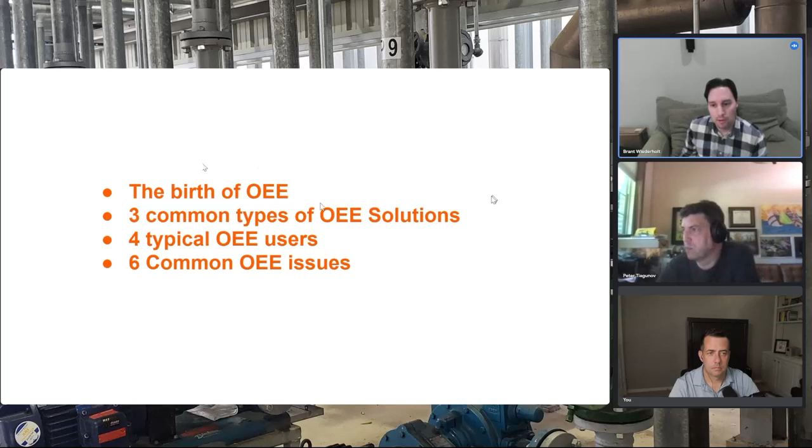Let's go into talking about ourselves real quick. Peter, you're the president of Agile. I would describe you as a solutions architect, a full stack solution provider. I'd probably say that your strengths are networking, architecture, database design, UI. Anything else you'd like to add to that? Pretty much the entire thing. Database, architecture, that's just part of it. Like you said, full stack means integration.

All right, now Johnny, you're the owner of Indusol. I've worked with you in the past. You've taken on a lot of small automation projects. You're mostly kind of a higher class Cadillac panel shop. You've done a lot of oil and gas type projects. Anything you're famous for, or did I capture that right? You got it right.

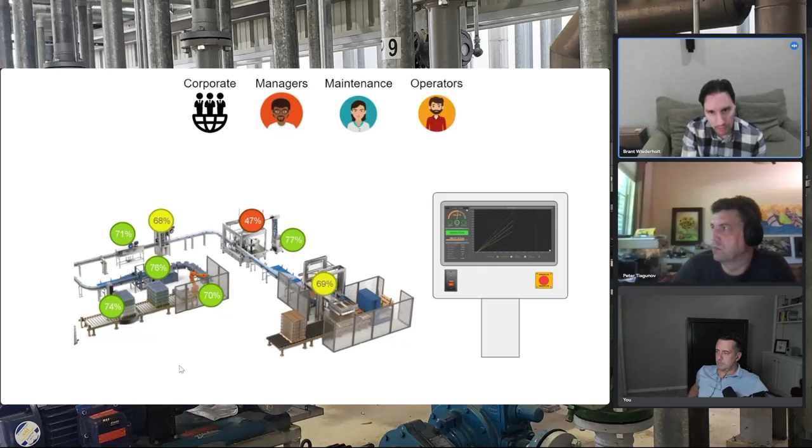So the first thing is that once a plant is automated, this is the third generation of automation. The process is already automated, and now we need to start collecting and analyzing some of the data on that production floor. So today's OEE discussion is going to try to solve the problems for four different users: corporate, managers, maintenance, and operators. Each one needs a unique type of solution and different tools to analyze. Let's go through it.

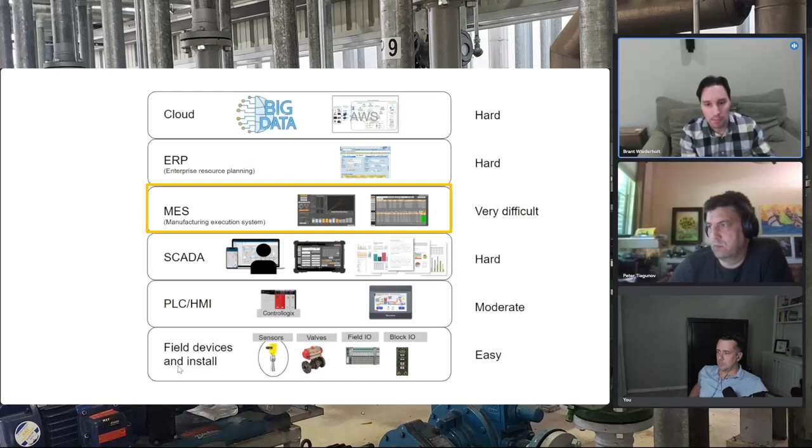So inside of MES there are different features. Today's focus is only going to be on the one at the very bottom, which is the performance analysis. This is going to be the OEE. Other discussions about MES we'll have to do in a later video.

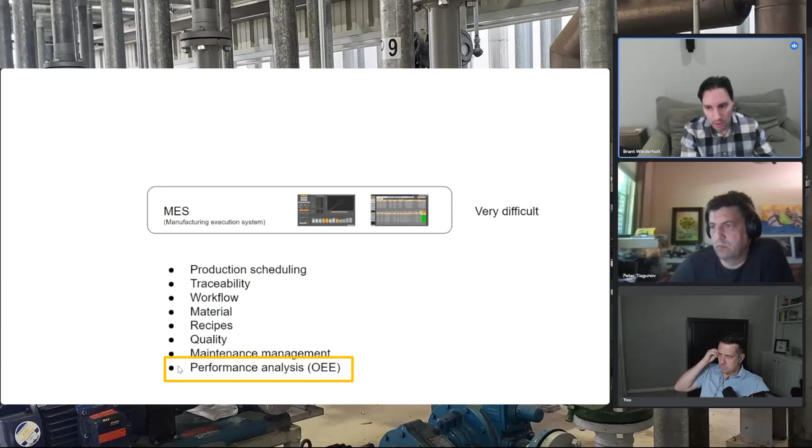So this mostly is a discussion about trade-offs. There's lots of different ways we can go about solving this OEE problem, whether it's a digital thread or a UNS type architecture, whether it's even worth looking into an MES or OEE solution, buying or building, or the type of people who want 150 different reason codes for an OEE solution. So the trade-offs are going to be initial cost versus ongoing costs, commissioning speed for scaling, whether you want flexibility, whether you can handle human intervention or need that data to be automatic, and whether you want an open or closed architecture. So we'll be going through all this.

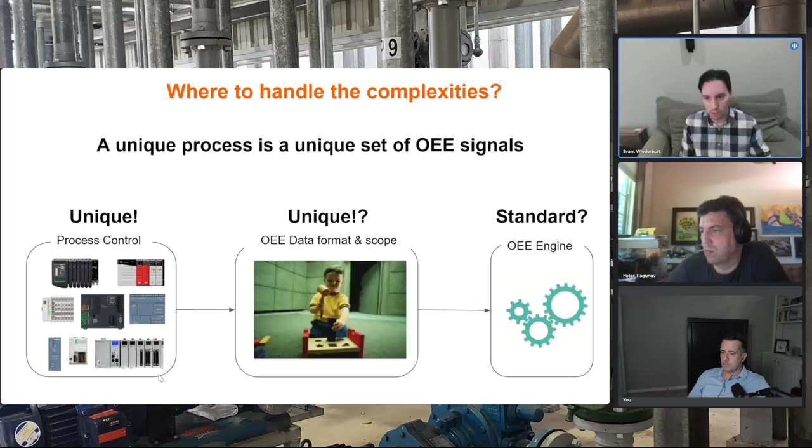All right, so another thing before we start, we want to talk about this. I posted something up on LinkedIn a few weeks ago about this, but this is where most plants start, and that's perfectly acceptable if you want to start getting into it. But they'll start with a whiteboard or an Excel sheet. They'll start capturing it and realize that it's consuming too much labor to actually produce these numbers. You'll find out that the numbers are being manipulated, that it's not real time, and that you're spending your whole day trying to update these spreadsheets. So this is a great start, fairly easy to get into, but it doesn't scale.

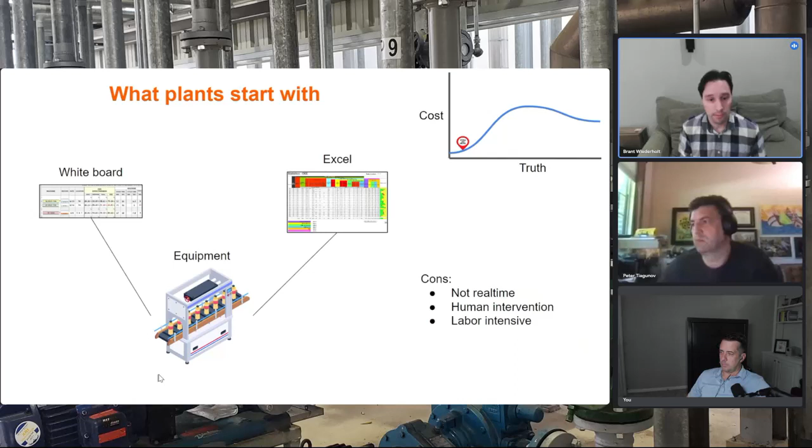So we're going to talk about three different types of OEE solutions: too far from the process, approaching the process, and part of the process. We're going to start with the first one, too far from the process.

What that looks like is, if you can see on the left-hand side, you plug into equipment and grab that data. You could go from 250 feet all the way to several thousand feet, but you'll see that corporate is seeing some data, though these two are so separated from each other that they don't necessarily communicate. They don't get to see it. The operator doesn't get to see what is going on or what he needs to improve upon. And corporate is only getting data that it receives, with no idea about its accuracy. So honestly, corporate is probably getting bad data, and they don't even know what to do with this.

So it's just what I would consider a very short-term solution. It doesn't provide a whole lot of value. And most of the time, what happens is that the operator is actually manually entering reason codes, which I'll go into a little bit later, but when they manually enter reason codes at the end of, let's just say, the end of the shift...

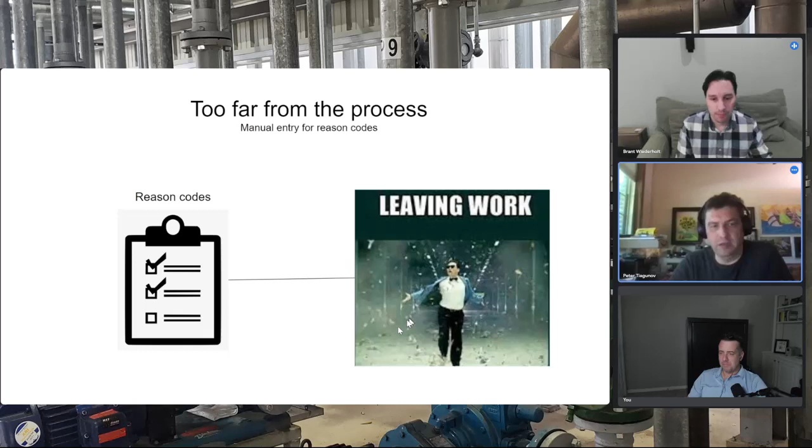It's kind of like asking a fireman whose house is on fire to fill out a form before he goes in—precisely. Like let's do some inspection before figuring out which category of fire, what's precisely going on, how it probably happened. Do some analysis first? Of course they do the analysis, but without any report—all of that is done after the fact, all the paperwork. Same thing here: the operator is nearly the same as the fireman in this scenario. All they need is to get it back and going. That's the only thing they'll think of.

So if that's the case, there's going to be a report at some point. And if you start really analyzing a certain line and realize it's not truthful, then this report is worthless because it's got too much human input or intervention. So why even produce it—that's our problem.

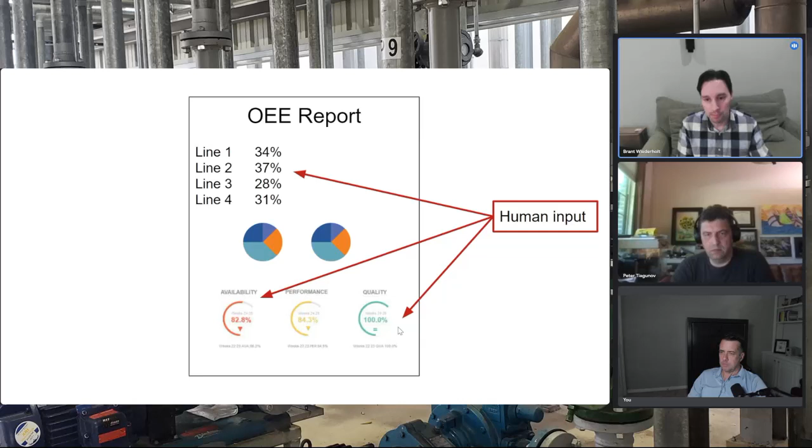The only time I could see this actually being put in place is for machines that don't have a PLC. You're not going to get a whole lot of data out of it, and you're not going to get an accurate, correct OEE solution, but you can get performance, uptime, downtime, how much is actually processed. This is a perfect application for it because you're not necessarily trying to capture high volume—it should be something very repetitive.

Now, a lot of manual, and it should be repetitive. Yep, so alright.

So now we've actually fallen into the second category, which is the standard typical solution. This is what we see all the time. There's different variations, and we can talk about a few of them. But it's what I call an OEE IT special. This normally is a cloud type solution. So the concept is that they could go onto the production floor, connect and pull up all this data into the cloud. Let's talk about a little bit of it.

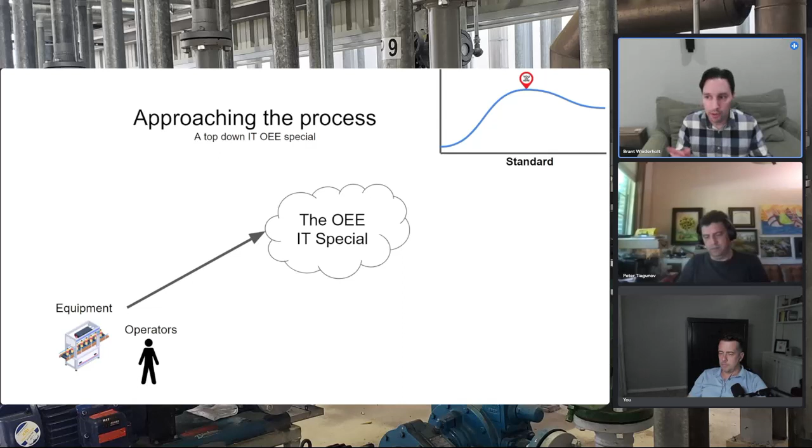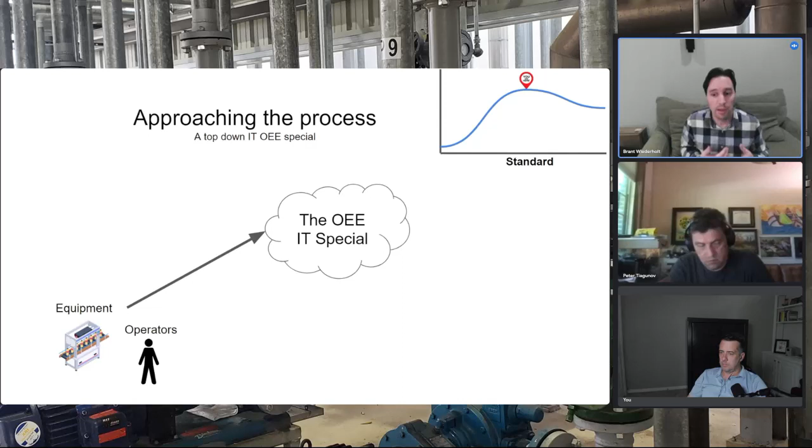If you can see on the top right hand side, obviously the price has gone up. It depends on whether there was a cost associated with the initial hardware, and most of these cloud type solutions have a subscription based model. They could be subscription per month, or it can be something to where it depends on how much data you consume, and they just charge you on the data.

Here's a list of Amper, Plex, and Peter, you might not know this, but Rockwell Automation purchased another piece of software called Plex System. Yeah, Plex actually is SAP online in a way.

Got it. So then there's the Redzone that we talked about. There's SAP DMC, now it's just SAP DM. Then you've got Shoplogix, Versacall, Vorne. There's a bunch, got to be at least 500 out there, and they're all screaming to be the number one solution provider. But these are solutions that can scale fairly fast, but still have an ultimate flaw in the design of it.

Let's say these type of solutions do have integration to the automation layer. So they have some way of talking to the controllers, typically OPC UA, I would say, not to mention OPC DA, yeah, on some of the older plants. So because they have some of the connections to the PLC, we actually have it right there.

25 to 60% of the data is now automatic. They still only have alarm analysis, and we'll get to this a little bit later, but they do not have root fault analysis, and we'll be able to talk about that. Before they can even get anything, they have to learn about the process a little bit and try to figure it out.

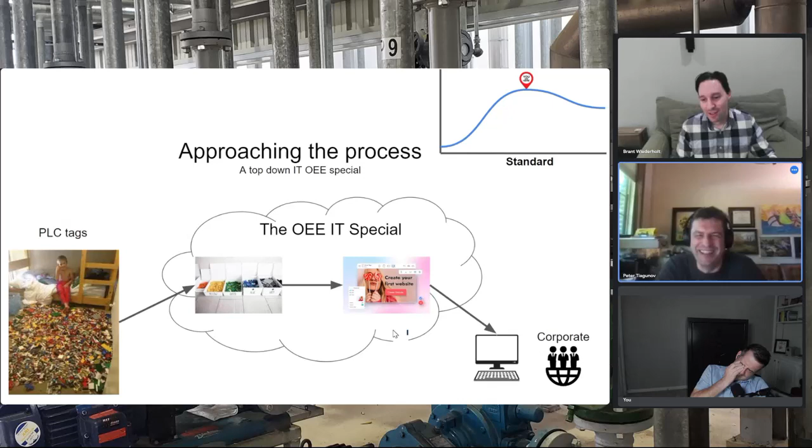So Peter, my biggest problem is the fact that once you take some of this data—you've burned through, I don't know, whether it's 200,000, whether it's $500,000—you've cleaned it and contextualized the data, and you don't really actually know whether you've done it the right way.

So there's speculation on how fast they went through and moved through the plant, but there's no certainty. So they're saying alright, now we got all that mass, all that zoo coming at us, all that noise that the zoo produces—let's try to make sense out of it.

So they put some wizard who tries to apply certain rules and says, hey, now this is how we're going to interpret this. Well, guess what—you have exceptions on top of exceptions on top of exceptions because the zoo is zoo. You have to know the process.

You have to be at least a little bit familiar with the machine, how it operates, what kind of signals it's capable of, what kind of signals it's not capable of. Some general attempt to interpret the noise, the zoo noise that comes in, and the higher tiers—it will not work.

It's not going to be successful. It will be successful if you have no zoo, if you have the same machines over and over, or if you have a preferred supplier who you told specifically before they even ship production equipment to you to have that certain type of interface to collect the performance data - let's call it at this point an OEE driver, OEE connector.

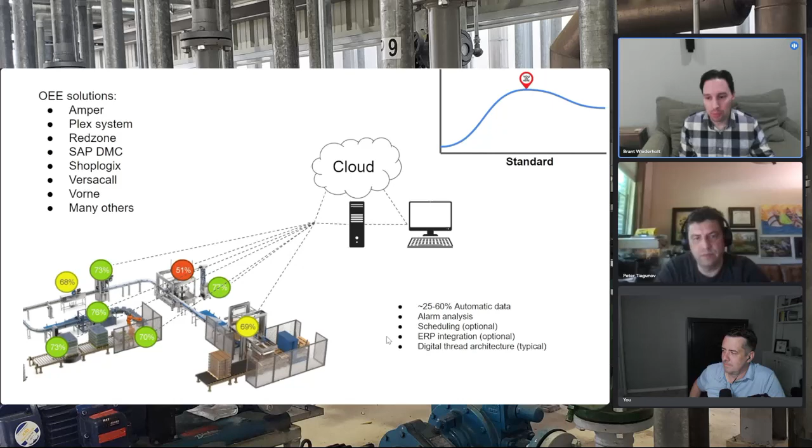But Peter, that was one piece of equipment, one line. The rest of the plant had nothing. It was given for free - it wasn't even part of the plant requirements. It was given for free by the machine builder. There's no integration, nothing - it's all done in the PLC. We're not even talking about some databases, clouds, etc. It's all done in PLC.

My biggest problem with the cloud solutions, Peter and Johnny, is the fact that once they clean it, they are not a node in an ecosystem. So they consume data, they don't produce the data. There's a lot of time spent, whether it's 200,000 or 500,000 dollars, they burn through a lot of labor hours, but none of it is provided to the UNS, where you can actually use different pieces of software to find the solution. You're showing here there's no UNS. Yeah, correct.

So what you've got is a vendor lock-in. What you've got is a data silo. So again, it's only a consumer, not a producer - call it a big data silo. It's under the assumption that one piece of software is going to be the only solution that you need, so you don't need any other piece of software.

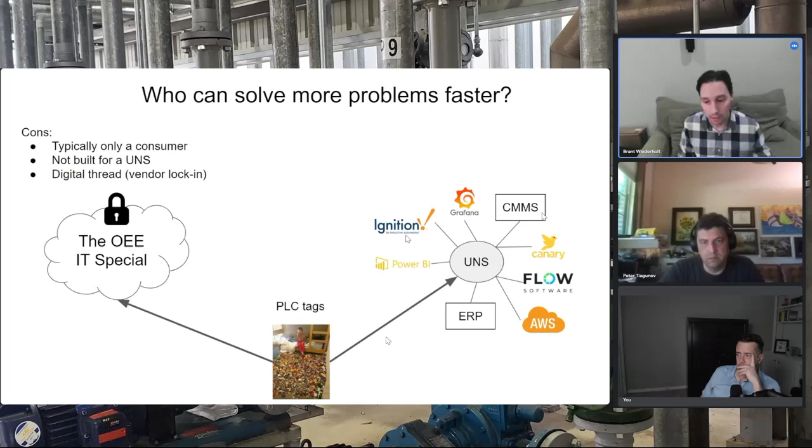On a fundamental level, on the left-hand side you've got an ERP, MES type of programmer. This programmer hasn't worn - I know this sounds funny - but my first question to them would be, have you worn earplugs for years? If the answer is no, they're obviously not spending a lot of time down on the production floor. Now, if you have a PLC programmer who evolved into an ERP MES programmer, then you have a success.

Because you have the guy who actually survived the field. You can't do it the opposite way. I don't know, maybe there are exceptions, but most of us here are basically coming from the floor, bottom up, from production floor up. But I haven't seen anyone who actually went from up down.

So on the fundamentals of how you can execute an OEE project, do you start with the ERP MES type of programmer that's $250 an hour, or do you start with an OT programmer on the production floor that knows the process? The answer is neither.

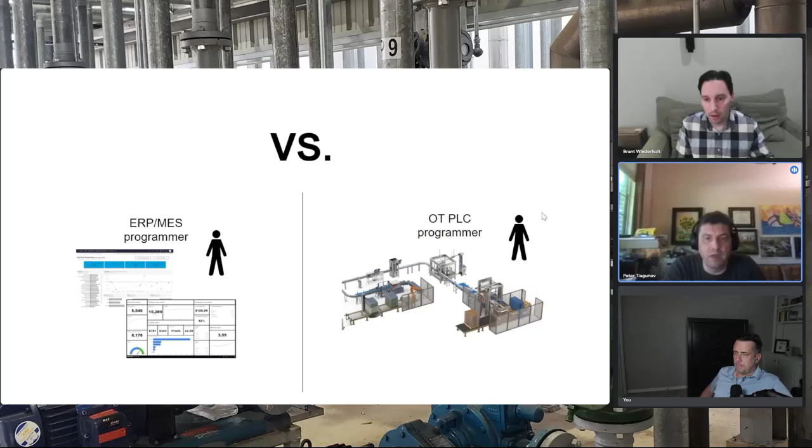Well, you would need PLC absolutely, but you start with neither of those. As soon as you say the word 'program,' it means you already have a project in place, and that's where you have these resources. The resource on the left is not going to be anywhere close in experience to the resource on the right. Completely different background typically, completely different objectives, different instruments, tools, different world. They don't mix, let's put it this way.

So then we're going to go into the third process. Part of the process is this solution. Basically what you have is you're embedding an OEE driver and a root fault driver into the PLC or into the equipment, and that provides a standard user interface into your OEE engine. This is a cheaper solution, mostly because it's not subscription-based, because the OEE engine sits on-premise. The hardware is already there because naturally you need a SCADA system anyway, so it kind of blends in.

So let's go into what this would look like. Essentially what you're going to do is have an OT programmer throw in the two drivers onto the equipment automation system, where he goes into the program, makes the connections. It's a process control system, a controller. So the PLC programmer looks at the process, looks at the program, gets a general idea of what's going on. It does not have to be, and typically isn't, the one who wrote the original program for the equipment. He just adds those pieces of software.

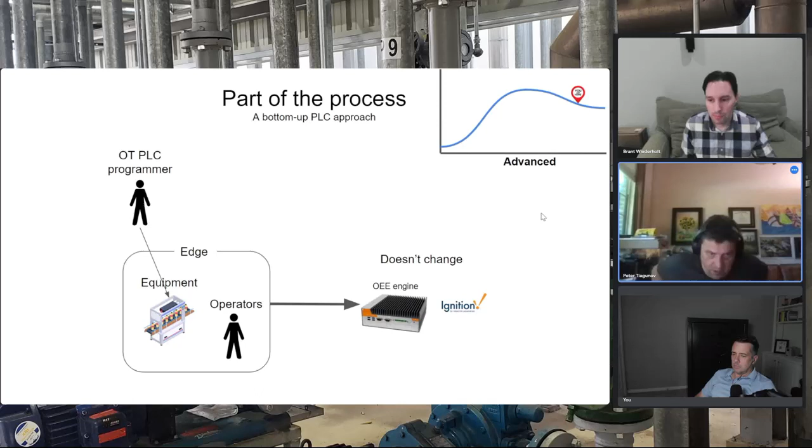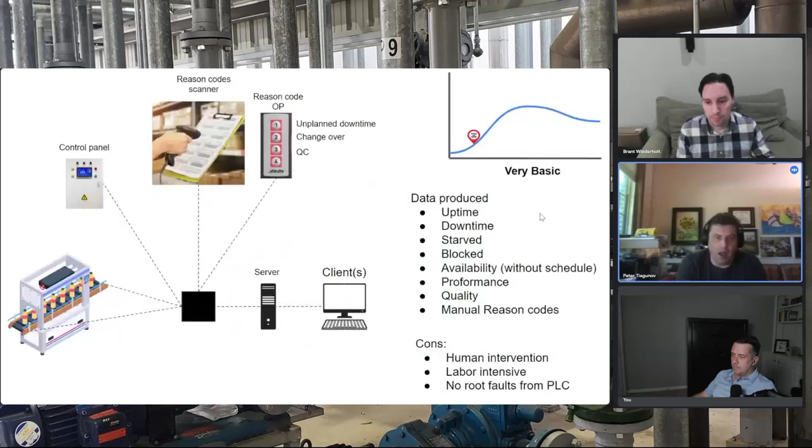Now the rest of it is of no interest, because at this point you can use any system and it will typically succeed. So the answer is very simple: you want to succeed, take your money, take the resources from the higher tiers, move them to the lower tiers, study the process, integrate specifically to the process. You'll get the standard, normalized output. You're done. You can pick the cheapest software out there and it will succeed, because it's easy to process a standard thing that looks the same, sounds the same, does the same blinking, everything is the same.

Yep, so yeah, fair, that's where we're getting.

All right, let's skip into the next chapter here. So it's the 4 typical OEE users, and again, they're going to be the corporate, supervisors, maintenance, and the operators themselves. So let's talk about corporate real quick.

The big problem or the solution that they want, or the answers that they want, are mostly trying to figure out capacity. So what is the capacity? Are they running the plant at capacity or not? Can they run more? So let's go into, I'm going to go ahead and scroll over to our metrics.

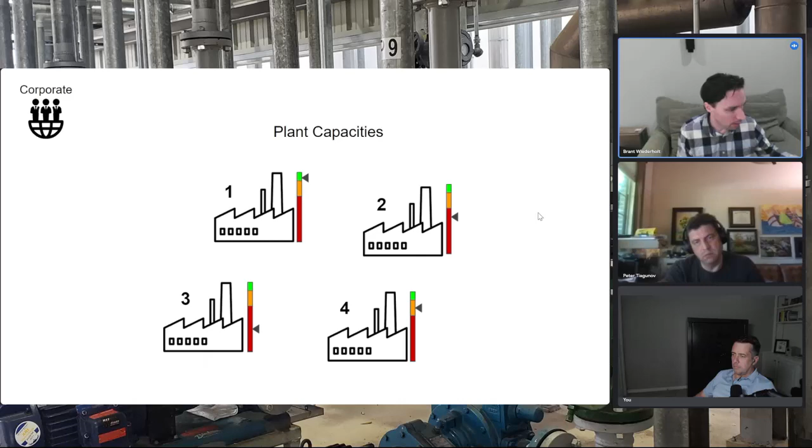Give me one second. All right, so capacity, let's go real quick. So this is the metrics - this is an OEE solution using Ignition. We'll go into a little bit more of the details later, but let's just go with Ignition with the OEE driver on the controller.

So say you're corporate and you want to know capacity. Essentially what you're going to do is go over to the historian, go over to the OEE aggregation. So say the problem is that corporate wants to know whether they can get rid of or eliminate the 4th shift, which is going to be Sunday and Saturday, and they want to know whether they can actually meet the production that they're wanting without the 4th shift.

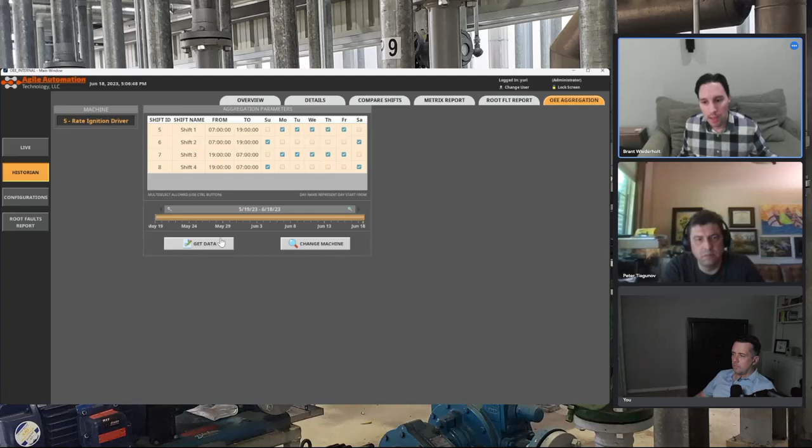So what I can do is highlight all 4 shifts, I can choose the whole month, and then when I get the data, it'll capture what I've been able to produce in the last month. And if I wanted to do that without the 4th shift, you can see that it gets reduced. So does this meet capacity? Will I still meet production and orders if I eliminate the 4th shift? So that answers that problem. All right, so then I'm going to go back.

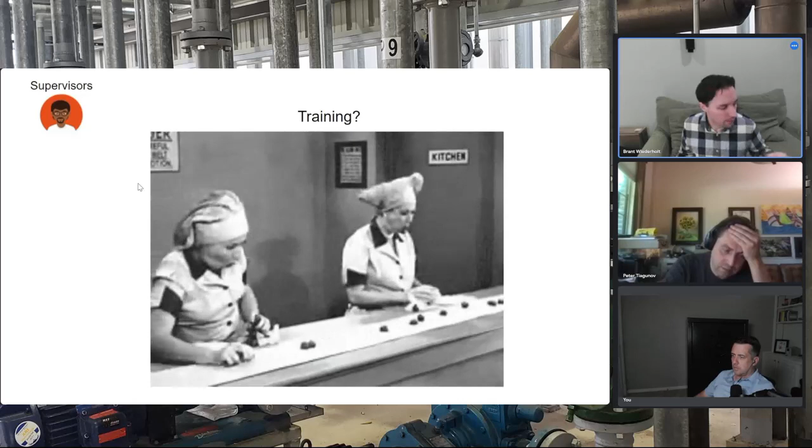So the next is going to be supervisors. Their big deal is, do their operators need training? Is there one operator that outperforms the other one? So we're going to go back to the metrics and we'll show you - there's actually a couple of things that we can show you.

We're getting into the states without even talking about what those states are, where they come from - what's the difference between production and, let's say, changeover, and production and starved and idle? How do you even figure it out? We'll get into the real details a little bit later, but for now we're gonna act as if we know this piece of software, and we'll just run through this real quick, and then we'll talk about the details later.

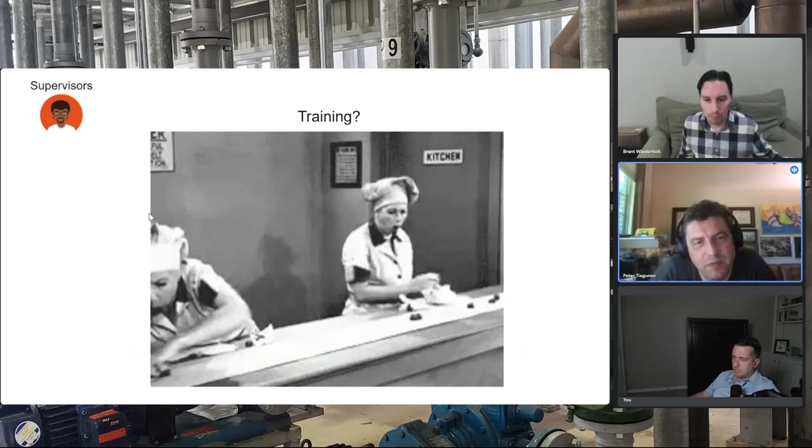Yeah, so that's the whole thing you've got going. You want to know if you're starting to have the same type of downtime, or it could be running but just not at the same target rate.

There's nothing that says, hey, out of an 8-hour shift, we're expecting it to run only 7 hours, because 1 hour is expected downtime. Call it contractual downtime, where you typically don't see it, but I see it a lot. So it's expectation versus reality — expectation is one thing, reality is different, and how much you can actually claim as expected downtime.

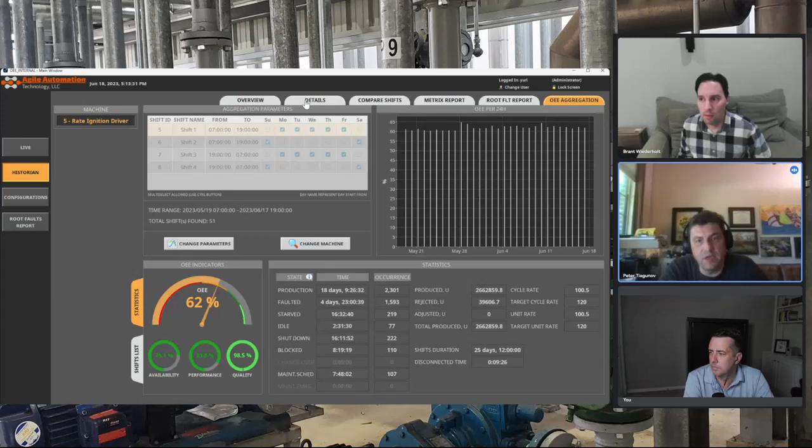If you wanted to look at the adjustments, there should be a historian. In the historian, you have the adjustment part — adjust OEE, boom, there you go. You can actually throw in additional rejects, and you can add scheduled maintenance, emergency maintenance, some shutdown. I'm assuming shutdown is a little bit vague on this particular one.

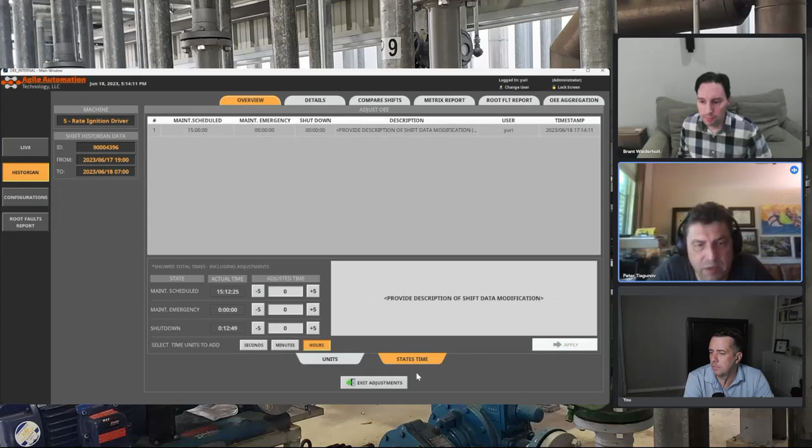I think it's expected downtime. So shutdown means it's been shut down for a reason and it's not supposed to run. So every time it's in shutdown state, OEE is not going to get impacted, because you're not expecting it to run. Makes sense, right, Johnny? Yep.

It's kind of interesting — this is where you get to: do you have a schedule? You don't have a schedule. Do you know what your expectations are? And you get to this point, like, how can you measure OEE reliably if you don't have any reliable expectations?

And that immediately throws the whole thing into utilization. You have production equipment on the floor, you assume it's supposed to run 24/7, and you measure it, and then you start messing around saying, well, it didn't run 24/7, it ran like half of it. How am I gonna deal with the other half?

But we're not even interested in that. We don't care about whether it was available, whether it was downtime. All we're interested in, all our interest in this system revolves around one thing only: we want to see it running, and when it stopped running, we want to find out reliably what was the reason for the machine to stop running. We don't care what the results are — we want to see what's stopping it, and reliably find out what exactly caused the machine to stop.

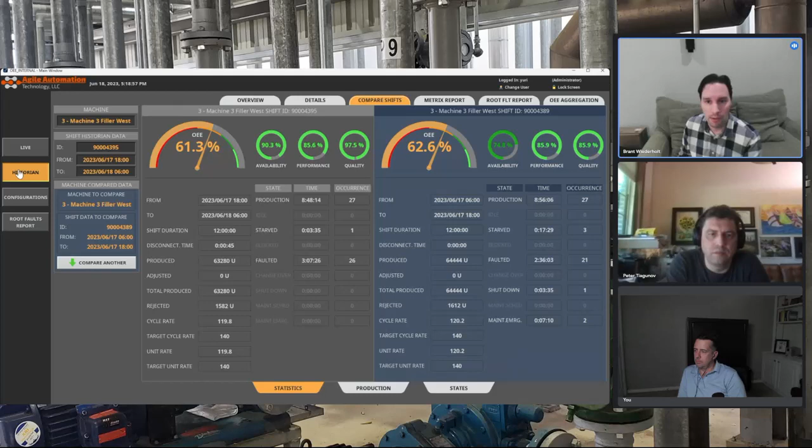So then what you've got is you can start seeing how many times it faulted versus the other one, what it produced versus the other one. So if the second shift is actually outproducing the first shift, you'll see that. You can always see that here with the OEE calculations, and you could scroll through, even see it historically farther out, so you'll start seeing a trend on first and second very quickly.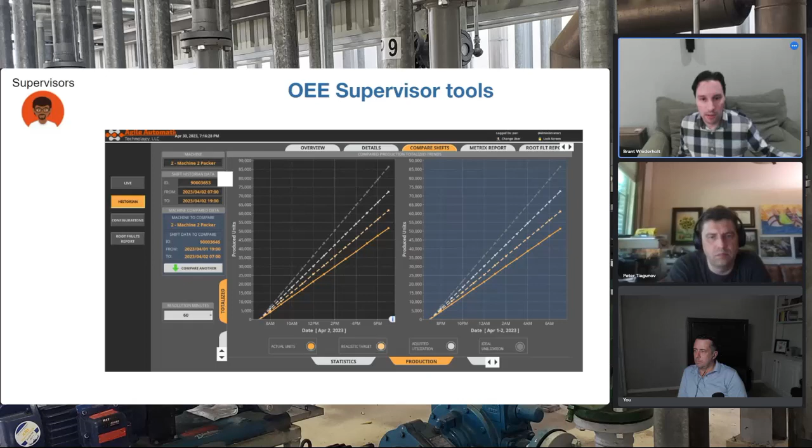All right, so let's go into the other problems. That was the supervisor - he did the compare. Then you've got maintenance. So maintenance, what do they need? Well, they would probably need a couple of things.

One is they can actually go to the historian and start looking at any of the OEE where the performance is actually low. They can then go into the root fault - let's go into that. They can do the root fault of the machine on that shift, or they can see it live.

But then again, this is where I'm a little bit not happy, because you're throwing the terminology around without even knowing - what is a root fault? What is production? Peter, actually I got that on the next slide, so we'll talk about it.

All right, so here we go - what we're looking at is the root fault. Is it live? Yes, assuming this is - I mean this is a simulation, it's simulated. So we're looking at some simulated equipment that is currently running a production shift, it's in production state. What we see on the right-hand side, where it's selected the root faults, is the hourly distribution of faults for that specific machine.

You have a timeline that shows when faults increased and you see the occurrences. Unfortunately, the simulation is a bit evenly distributed, but anyway, you see the first hour had no downtime, no faults. The second hour, around 7 a.m., hit several faults. It was one, then none, then it starts occasionally increasing, faults basically evenly distributed across the next 7 hours. Not the best example here, but anyway, that's where you start seeing a much better picture.

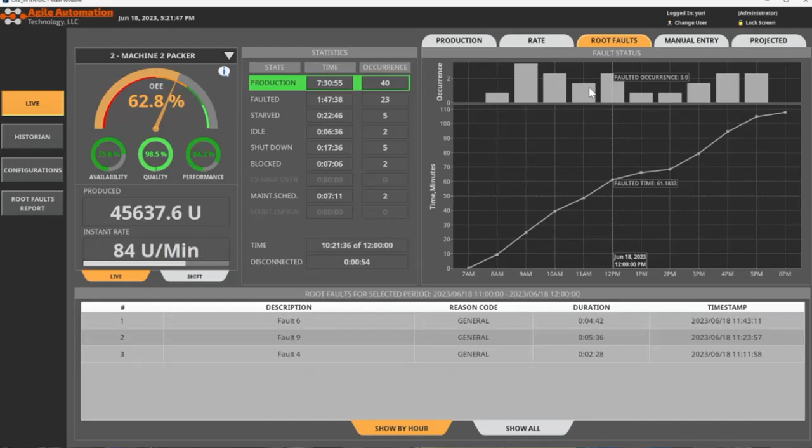There you go. See, here you have a case where you have some fault, and by the way, click on the hour and occurrence, click anywhere. Okay, gotcha. There we go. See, click the tallest one. There you go, see what it does.

It tells you that during the 9th hour—sorry, the 3rd hour—there were 4 faults totally recorded, and those faults caused the machine to interrupt production. One of them is fault 4. You have a timestamp on how long it took before the machine resumed production or transitioned to another state. So what you start seeing here is the unexpected downtime during this particular hour of the shift, and the reasons why the machine interrupted production have nothing to do with a human.

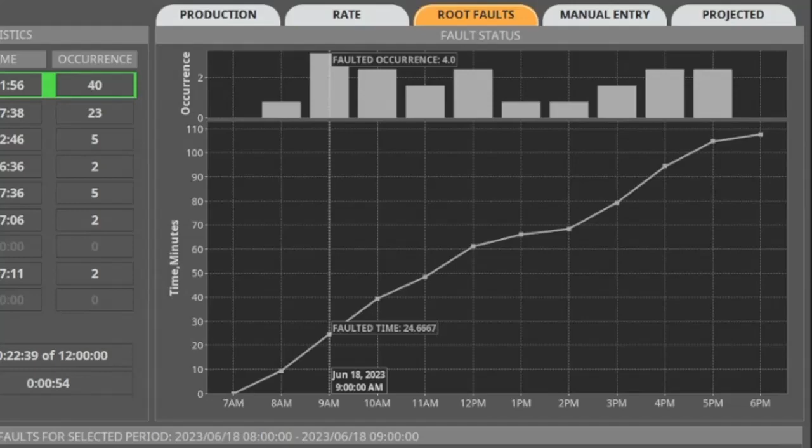That comes directly out of the native fault logic of that specific equipment. It is simulated here, but let's talk about that. By the way, the fault description is custom. So this is usually simulated—normally they are taken from the PLC.

All right, let's go into what root fault is, because this is a big deal. Say you have a piece of equipment and you open the door—that obviously shuts down the equipment. Typically what happens on the HMI is you get flooded with a bunch of cascading alarms. Imagine a plant with about 150 devices, all plugged into the network—your network is just going to get flooded with these alarm triggers.

Depending on the type of system, your cloud solution would see all of these alarms unless there's some logic embedded into the PLC, because these alarms happen so fast. So really what you want, instead of an alarm list, is a root fault—the one that's actually responsible for the alarm or responsible for the downtime.

Let me get this—do you have the diagram of the root fault? Okay, so the machine/equipment is operating, making production, then production stops, and at this point the logic kicks in trying to catch what is the first fault at that moment. It's configurable for a certain time frame to catch the fault. If it doesn't see a fault within, say, half a second or so, then it's going to say it's just an unknown shutdown—there's no fault, the machine has just stopped.

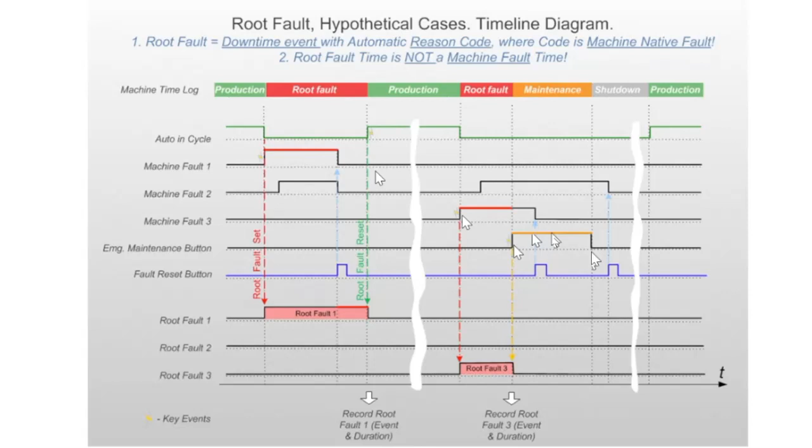And they're showing you why the machine keeps stopping, from the perspective of the machine or equipment itself, and also from the process. That's why we say if we're close to the process, we know everything about it. If we're far from the process, it starts becoming blurry and blurry.

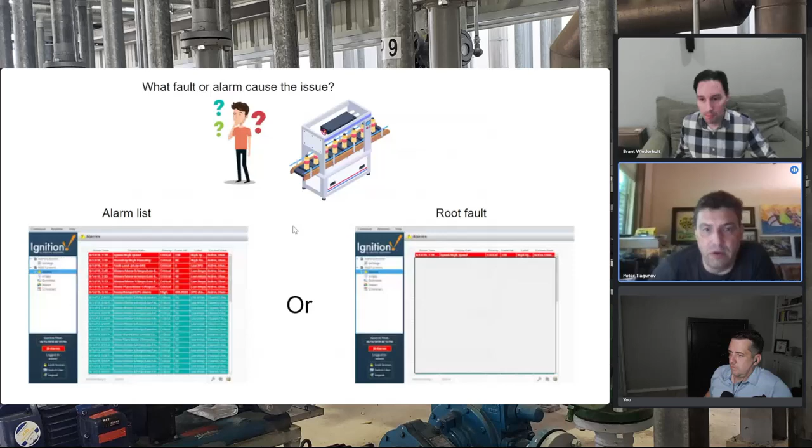It's the reason why solutions like this never get you to the truth, because you haven't installed anything into the PLC. You haven't learned about the process. You haven't added the root fault analysis logic to it. You'll never get to the root fault.

Let's emphasize measuring productivity. Measuring your throughput or equipment throughput is not OEE. OEE involves measuring how much product the machine produced along with a general idea that downtime was that much, without any specifics. That's not OEE, it's a very vague interpretation of production statistics. But that word gets used more often though.

Well, because nobody knows how to properly get this. So we've got root fault, we now understand about why we did what we did.

Then there's the last user, the OEE operator. There's a very good chance he's going to have an interface showing him how his shift is doing. I think it'd be wise to also show him how his last shift did. It might just be connected to a piece of equipment, or he might be dealing with a whole line, so it would show not only per machine, but also per line.

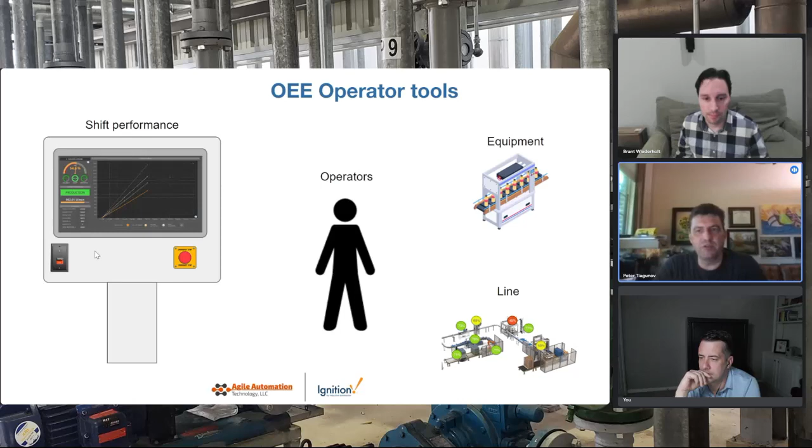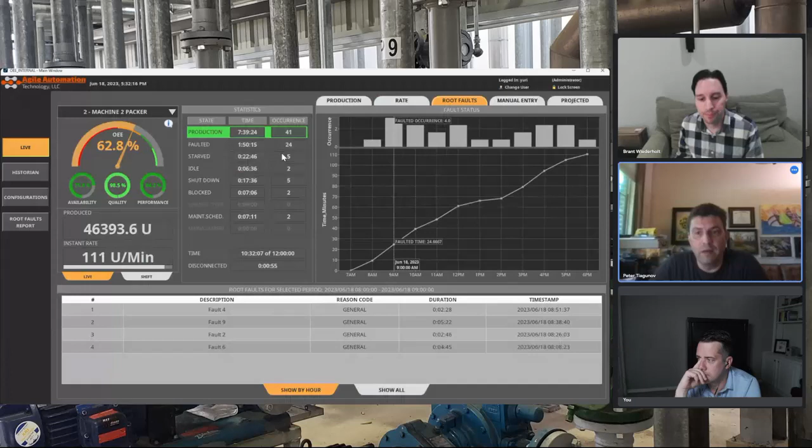They were constantly running on a low buffer, and it caused the machine to go production, starve, production, starve. It was thousands, hundreds of thousands of those transitions during the shift. So what it took was simply increasing the buffer. Before, the machine would signal the upstream machine saying, hey, send me less. Now it's like, no, send me more. I'll have more, because that's so infrequent. That immediately took it to the next level.

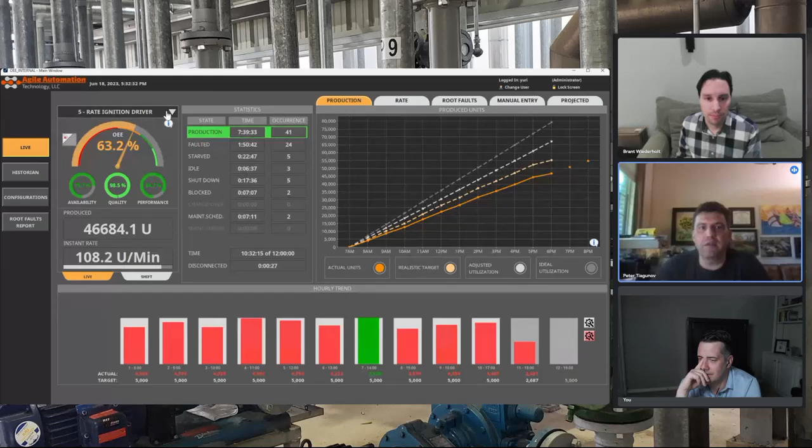But look, the operator has no clue. They look at this and they don't understand why. They don't know that there's a connection between the filler machine and the machine that sends the bottles to fill, and that the buffer is involved as well. That's the funny part about showing plants their OEE for the first time.

And Peter, we've seen this happen all the time. The first week they actually see really good data, they realize there are huge, massive faults, huge issues. Mostly it's availability, of course, but then it's also how they have the line set up.

So, yep, are you getting close, or you want to? Yeah, give me just a few more slides, and then we can go back. All right.

So there are 6 common OEE issues, and let's go through a few of these here. Of course there's more than 6, but we're just going to go through the common ones that we can recall right here at the moment.

One of them is unconditional disagreements. Peter, you and I have been through several different meetings, but even if we utter the words of how OEE is calculated, we've already started an argument right there. And who manages the OEE and how it's calculated. Anyway, let me go to the next one.

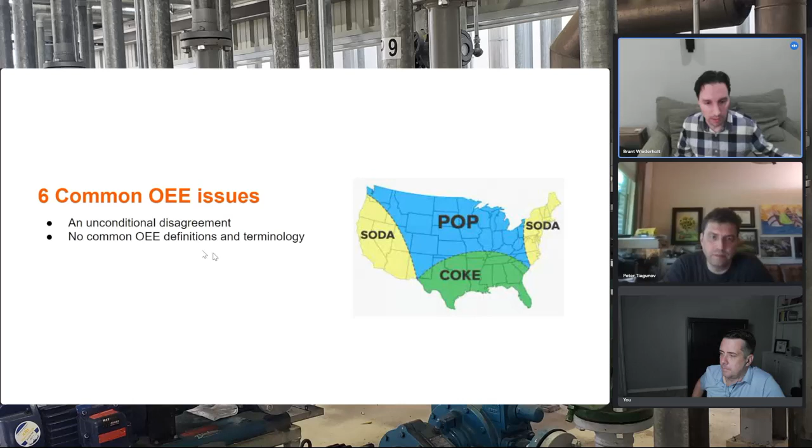Then we've got the toxic and extremely political aspect of it. A lot of these plants, we find there's a KPI that's already set, yeah, a KPI. Plant managers will normally be tracked by some kind of KPI calculation. And as soon as they realize this will be telling the real truth, they'll have to renegotiate how their KPIs are handled or set up.

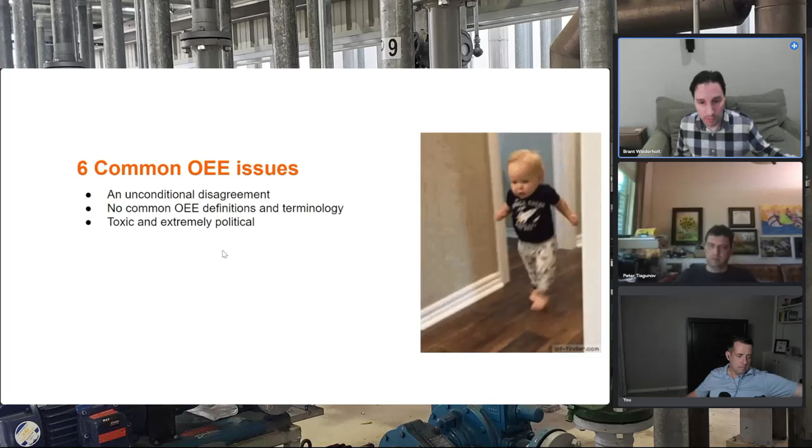Ideally, the operators will be set up with some type of promotion or some type of KPI, so if they meet target rates and that kind of stuff, they can perform better. Anyway, let's go to the next one.

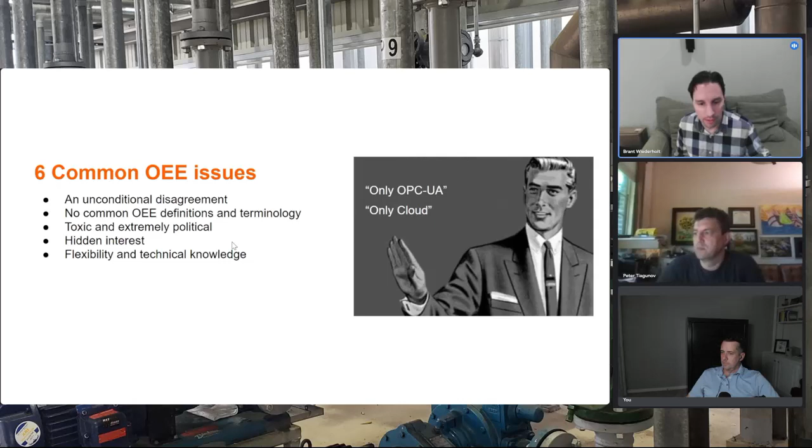Then there's hidden interest. As soon as we start having these conversations, we'll start having people who have already hunkered down to certain types of solutions or software, and only want to use certain architectures. Then there's the lack of flexibility and technical knowledge, and again, not willing to learn different technologies and different software solutions. So that's another issue we've come across.

This one hurts me the most. It's when they start tracking OEE, and they get provided some type of OEE solution, and then what happens is they don't hire any more staff to start looking at and analyzing the data. They don't hire any more maintenance people to start tracking down the problem. They assume that any type of OEE solution is going to minimize and save hours and save time. And a lot of times what happens is nobody looks at this data after it's been implemented.

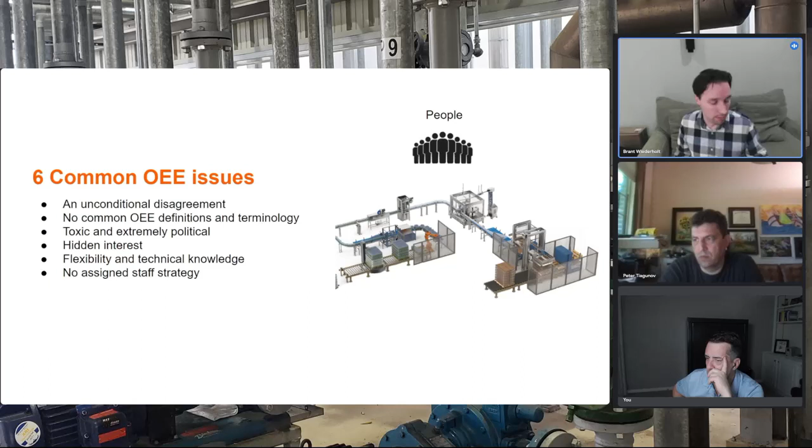So to me, this is the problem where, when given a Fitbit, you start to collect and make data, you start to analyze and look at that data, but that doesn't necessarily allow you to lose weight. My Fitbit will not automatically get you weight loss. That's right. And neither will OEE. It'll give you pretty data though. Right.

So real quick, if you are going to go into the OEE, this is one of the worst subjects that automation people have to talk about. Are you sure that's the worst subject? Oh yeah, definitely. If there's one thing that will make automation people the most upset, it's just talking about OEE and how to calculate it and do it.

What's your thoughts, Johnny? It seems like, listening to y'all talk about this, it's more about nobody truly understanding their business to begin with. They look at it as, I have this machine, it's gonna do X, and they don't understand there's the maintenance side, the bringing it all together. They don't understand how an OEE system works.

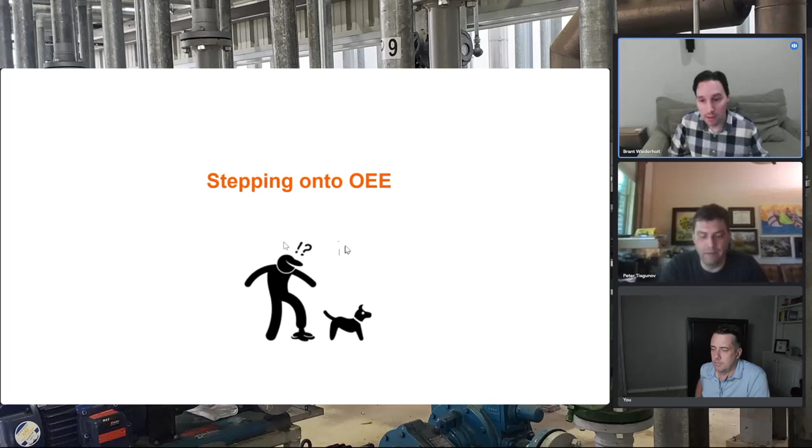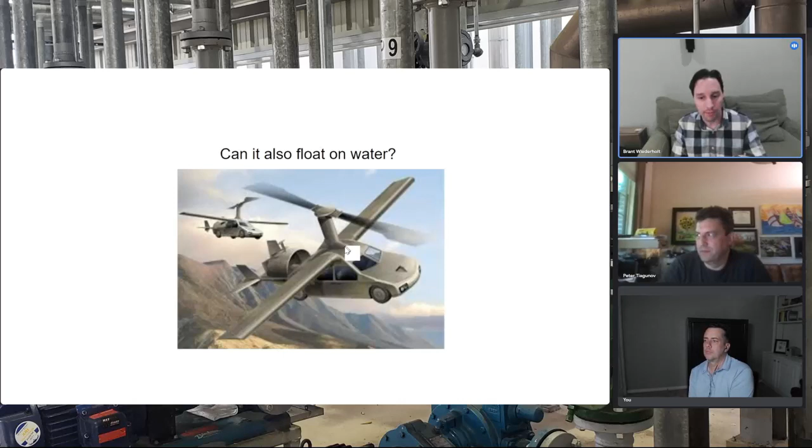Absolutely. And here's something for everybody listening or watching: you shouldn't be looking for an MES solution, you should be looking for the features inside of an MES solution. What is hurting the most, so you can actually solve those problems first. Do not go after a solution and try to solve all of your problems all at one go.

Ideally, what you need to try to do is not a waterfall type of architecture, you need to do an agile methodology. Get feedback from the actual integrator on what is being built and what types of problems you're having, and get a very custom, unique solution provided. In my opinion, an MES solution cannot just be a product that drops in. It's got to be custom. Every single plant is very unique. It can't be just a product.

Alright, we went really quick over it, so I do want to dive into it. A lot of SCADA system OEE solutions work like this: you plug in the different types of PLCs into a SCADA server, and you'll have the OEE engine sitting in ignition. You can also embed quite a bit of the calculations inside of SQL. You need the OEE tools, you need the reports, and depending on who the users are and what problems they're trying to solve, you'll have a wide variety of different solutions for that.

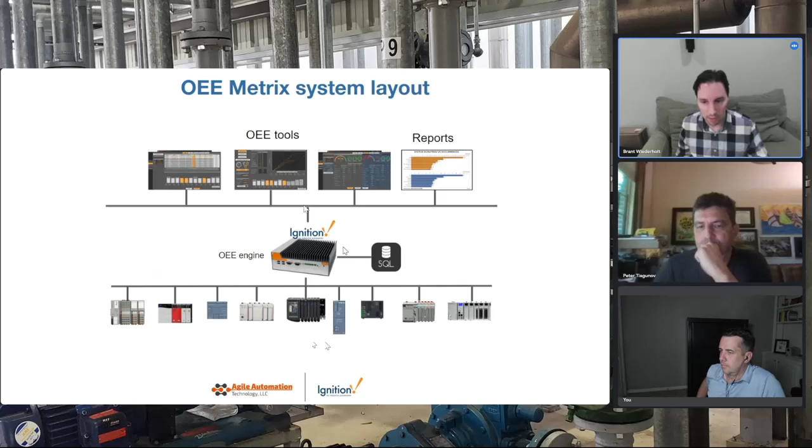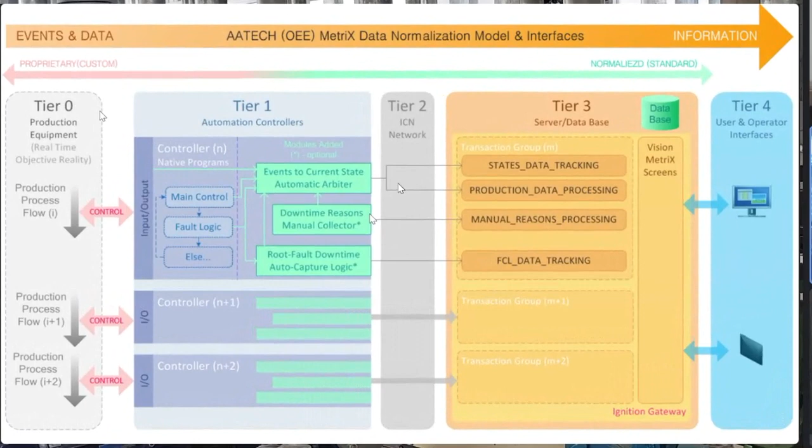Peter, I know you want to go through this one. You're looking at the chaos or zoo on the left, and you're looking at everything very well defined, very well integrated on the right, that's the pink to greenish arrow. This is where the magic happens. Magic doesn't happen in tier 3, where it usually does, or tier 4, typically tier 4 if we're talking about some cloud-based solutions. The magic happens in tier 1, which is the automation controller.

By directly interacting with the program that controls the process, extracting relevant events, dealing with the native fault logic, and producing a standard integration interface for integration with the higher tier, now no matter how many machines or equipment you have, they're all going to integrate in a standard way. Everything that passes tier 2 will be identical. Now it's not sensitive to latency on the network because everything gets buffered and stored accordingly, so network isn't an issue. In other words, you're not going to get an error on the sequence of events, it's going to reflect the absolute truth of how the process behaved.

This is where you start. One moment. Do you want to share your screen, Peter? I'm trying to share a screen, hold on. Okay, I'll share the screen, and I'll do this. You tell me if this is reasonable enough. You can see it, okay, right?

Yes, all right, this is where you start. You identify the states, equipment states that you want to deal with. Here's a simple diagram that allows you to deal with this. The ones marked with stars are mandatory states, meaning that's a minimum requirement you want to have. Those are production, machine not available, idle, and faulted.

This implies, we're not going to expand it further, but that's basically a foundation for the root fault. Now, as you can see, this is how it descends. It's a constant cycle going and deciding whether it's productive. If it's productive, obviously it kicks in the production state. If it's not, then it says, hey, it's downtime.

And then we're going to go through the procedure of figuring out whether expected or not. Let's go simple flow here. It's expected, is it a changeover? If it's a changeover, we're going to kick in changeover, although it may be optional. If it's not, then we're figuring out whether it's available or not.

Now, availability is a tricky thing because in some scenarios, the operator would be given an option to put the machine into not available mode. And we saw this, Brant, with that famous cosmetic case where they were immediately running to hit that not available button because they know if they put it in not available, their production rate is not impacted. They just immediately call it not available.

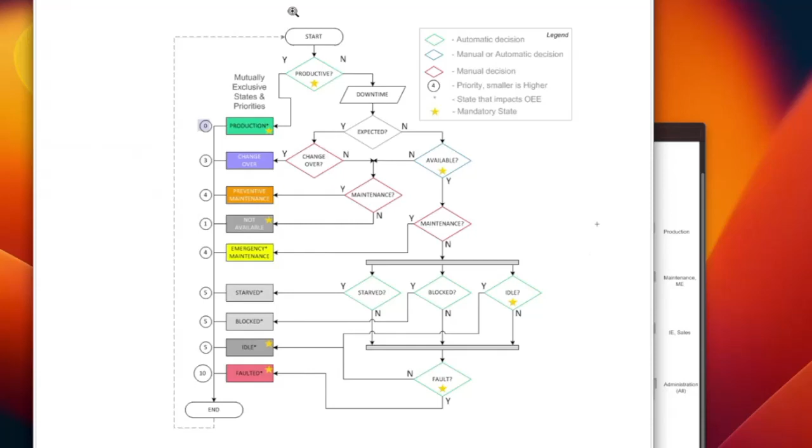Makes sense, right? Yep. Now, next thing, here's another good example. This is actually, I would say, a 23-year-old diagram. And that's where you have states that get translated through this logic, and then it kicks in machine time, and then you have a mutually exclusive situation.

If you want to take it to the very next level, this is how you do it. Because remember, these are all events as they were happening from their own event perspective, but only some of their time actually reaches the top. Obviously, production will override or supersede everything, or shutdown, but everything else behind the scene is not.

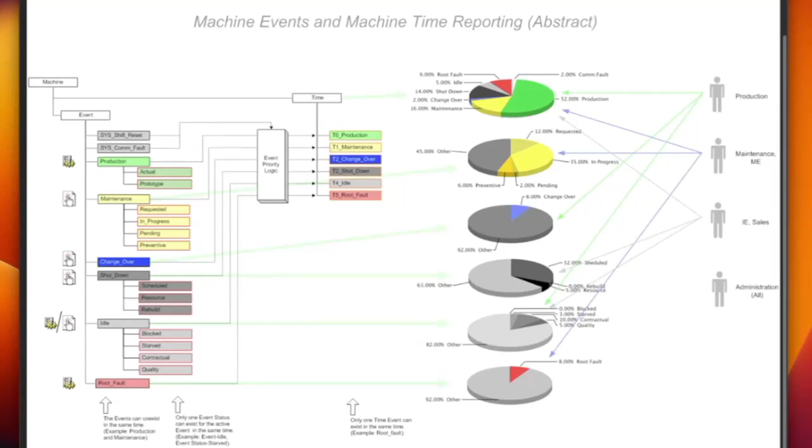Peter, I was using Windows XP about 20 years ago. I don't know what software you're using for this diagram, but it looks good. This is Visio.

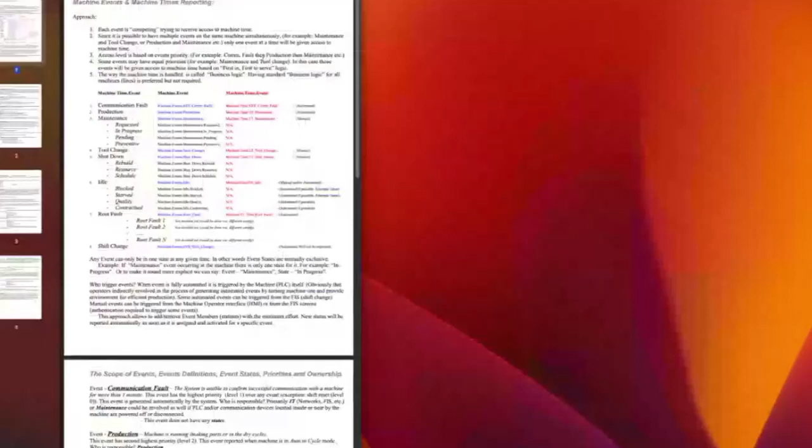And obviously this is where you're going to end up. This document is imperative.

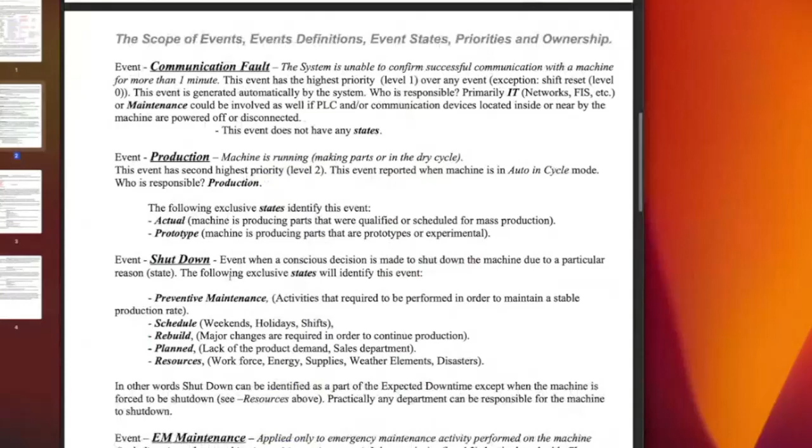Somebody has to start putting this all together, define those states, define what these states are actually, what they mean. I'm going through precisely the actual interpretation. When I call it a state, I describe what a state is.

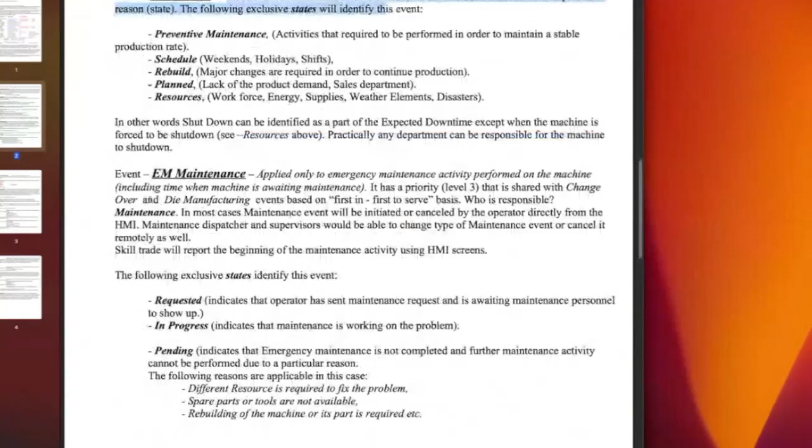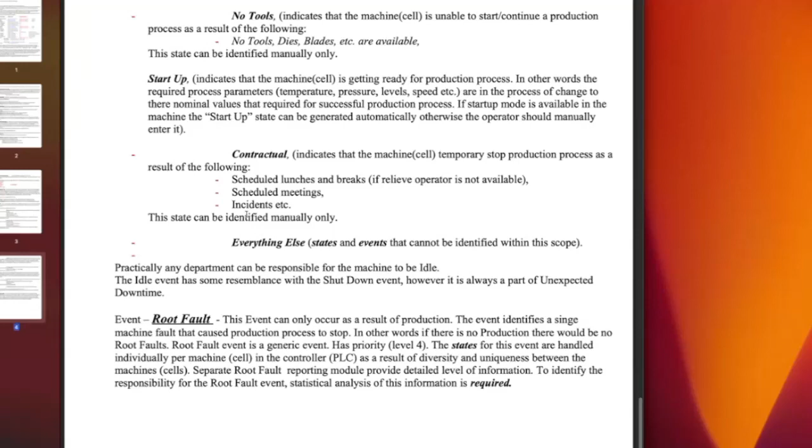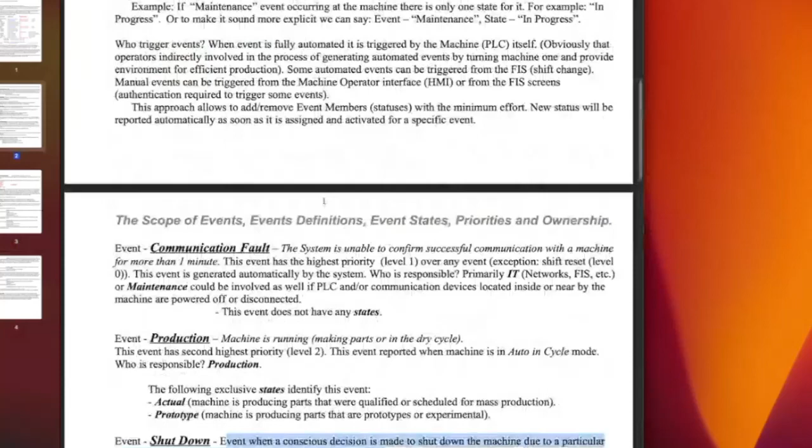Guaranteed to put you to sleep. But that's what's behind this. Writing this document doesn't require you to have an OEE solution, but it puts you in a position where you can start putting your wishes and desires of how you want to deal with this particular case. Like Walker says, tell us your wishes. Well, these are the wishes. But why do I have to wish every time for somebody who claims they have all the experience in the world running a plant for 20 years? Then tell me, write the freaking document.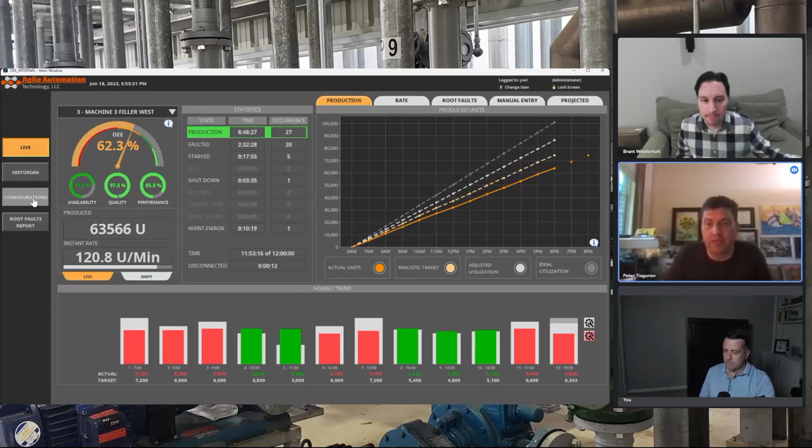Let me finish up with a few slides and we can start chatting a little bit. Bottom line is you need to grab the states and the root faults from the individual process and throw that into an OEE solution. We'll talk about this in a second.

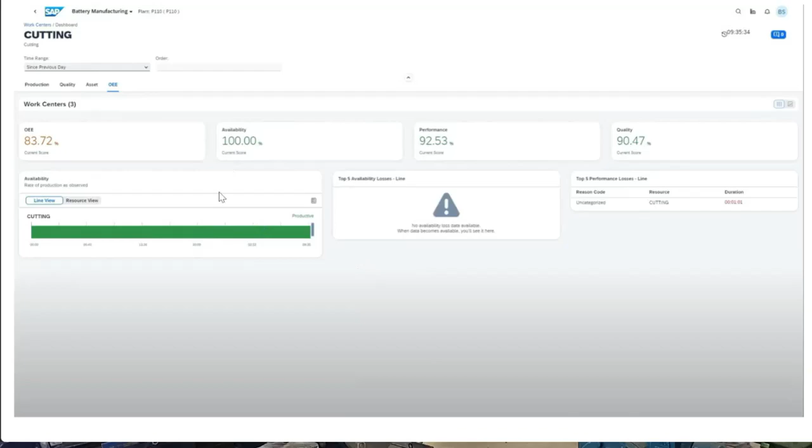Real quick, Peter and Johnny, this is the SAP solution for OEE. They show you the OEE number, the availability, performance. They've got the top losses right here, they'll have the availability losses right here. But it's lacking all the other tools, so you can't do comparison, or at least it's not showing that you can do comparison. So this is their solution.

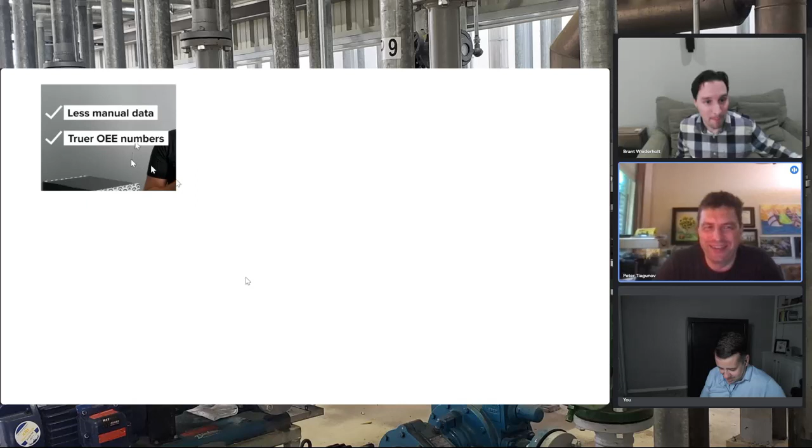One second here, Peter, you're gonna like this - a truer OEE number. This is one of the standard types of products where you're plugging into it, it's giving you a little bit of the data, but the reason codes - are they automatic or not? It's one of those, let me be honest. Well, yeah, you're correct, not honest before - you're just becoming honest at this particular moment, right? Yeah, let me give you the truth, right? Before it wasn't.

So maybe we can talk about this. All of these pieces of equipment will have some type of HMI. A lot of times you'll already have a SCADA system involved, because to feed this line you've got to set up the whip tank to feed the product into the production line. So you've already got some type of SCADA system scattered around the plant. You could obviously just add the MES layer to it, so you're not adding another additional PC to the production floor.

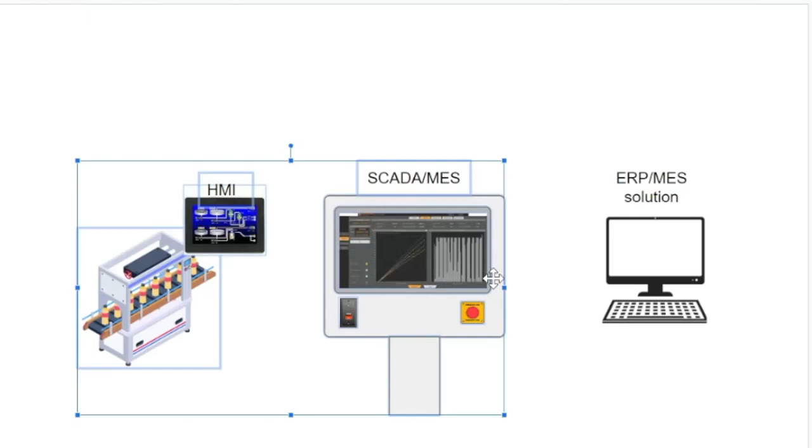So my issue is that you can't scale this out if all of a sudden we're adding all three of these user interfaces trying to communicate with each other. So I would rather, in a dream world, just have two different systems, and that would be all the operator would interface with. In fact, I'd even take it a step farther and eliminate the HMI, and just have the SCADA system interface.

Managing HMIs, hardware specific HMIs - let's be very direct, let's say in this case we're referring to Allen Bradley HMI. Managing Allen Bradley HMI and their programs, I don't want to do that. It's too much. I'd rather have Ignition talking to the PLC and getting the best of the two.

Well, but you got to understand, probably when they buy that machine, the machine has to be able to run without it, and it had it along with that. Well, my answer to this is very simple: to the machine builders, start putting Ignition on it. I don't know if they have a machine edition, but I think they do - they might have a machine edition or something like that.

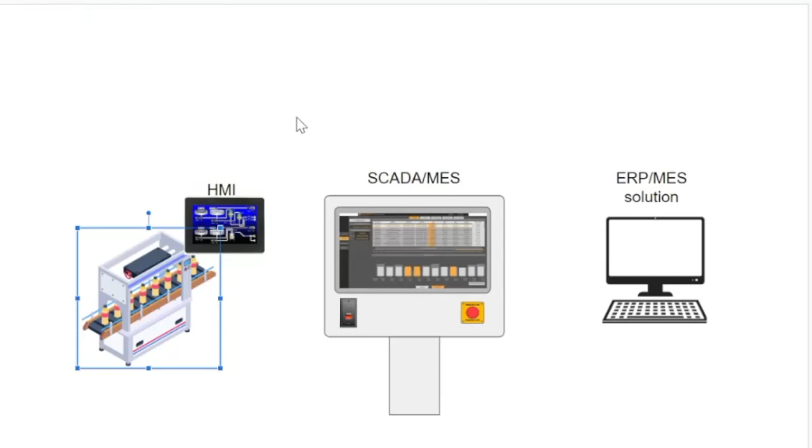Start using some sort of IPC as their HMI, and they can run their Factory Talk Machine Edition, and then whenever someone like y'all comes in, you can just load Ignition on it and be done with it. I mean, I've seen it left and right with those teeny HMIs and the operator running left and right - he does one thing at one corner, then he runs to another station, he clicks there, where in fact he spends like 90% of his time in one particular area.

Well, give them the fully integrated things on, let's say, an Ignition in one spot. You want it separated? We'll separate it, just a computer. Yeah, I mean the cost of the computer is nowhere now - probably the cheapest HMI will only get to the price of a typical PC. Not to mention that we can actually have iPads or similar devices, touchpads.

Yeah, because what is a panel view? Just a 12-inch or a 15-inch panel view is like 3,000 to 5,000. I just bought two 10-inch panel view pluses, and they were about $3,500 a pop. So just a 24-inch touchscreen PC is roughly in the range of 1,800 to 2,000. Then you throw on some type of software that can be managed centrally - if it's just one, it doesn't make any sense, but if you have multiple, it does make sense. Yeah, of course the cost efficiency is based on volume a little bit, but one probably may not be efficient enough.

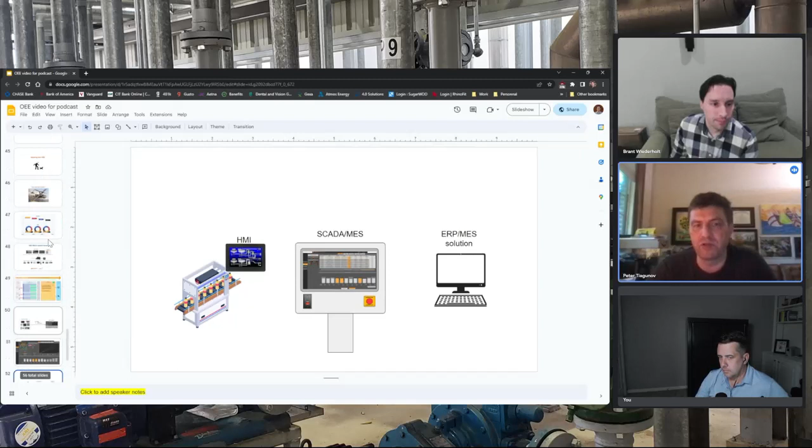But anyway, I would say, what we found in the past is, say we come to a customer and they want a SCADA system - we find their requirements fairly easy to deal with. You're wanting line status, some process, some tank farms, some mixing operations, some alarms. SCADA systems just seem easy to implement, some reports. But as soon as we talk about any type of MES, definitely OEE, that's when we start slowing down.

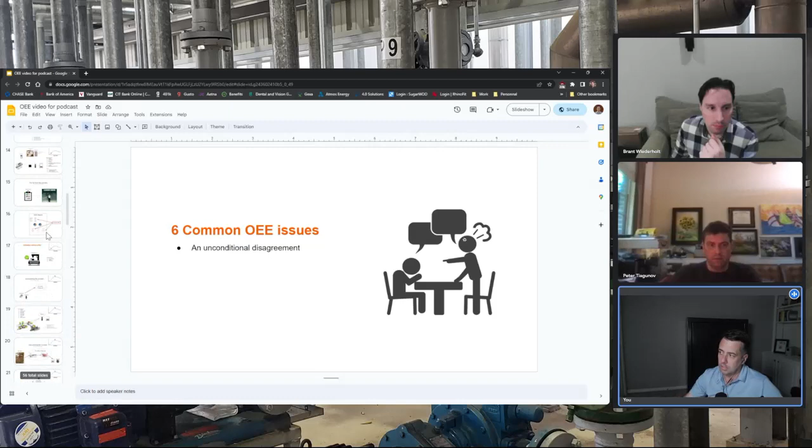And that probably comes more because you're dealing with corporate level people, and you're bringing technology to corporate level personnel, and at the end of the day they're looking at dollars and cents. They don't care too much about the flashy screens and this and that, because OEE seems more like it's really for mid-level management. It's great to go to the corporate level, but I can tell you that someone on the corporate level could give 2 shits about the reason code for why the machine was down.

But maybe mid-level management will want to know why the machine was down, who was running it. And there's another piece: you can't run a business from the bottom up. So with the barcode scanner, the reason codes, or any sort of user input into this system, there has to be a mentality from the top down that it's important they do it correctly. If they don't want to worry about that, move it out of the way and don't make that part of the problem. Training with personnel needs to be done too. Those are the biggest hurdles I see from listening to y'all.

I don't know, what do y'all think? Yeah, we've bumped heads with a couple of customers - we're a great fit for some, but not others. A good example: one customer just wanted to connect to our database. We had Ignition, and they were convinced they could clean up all the data and bring it to a dashboard, but it doesn't work. They assume we've already got the data clean and contextualized and know what to do with it, but it's not accurate.

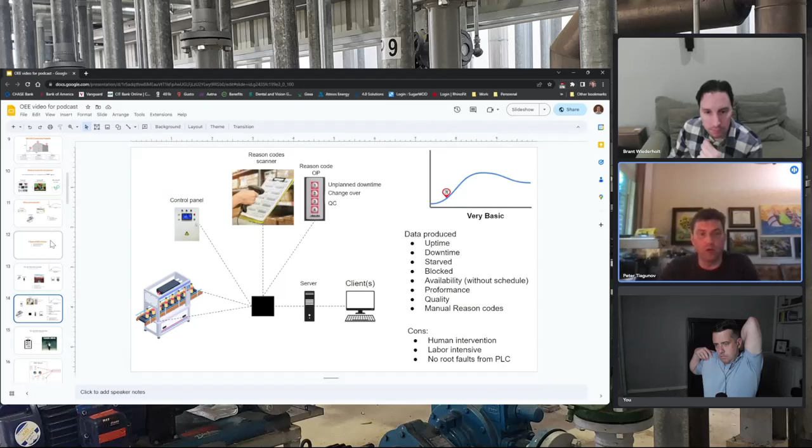Another issue - if you're looking at SAP, you could technically get some OEE meaning out of it, but it would be delayed, you'd get it kind of afterwards. But we're not just talking about getting a general idea of manufacturing performance. For a corporate-level plant manager, he's not going to be looking at live data. He might just ask, 'Hey, how'd the plant run yesterday?' That's probably really all he cares about - for them it may just be to compare: today it was bad, today it's better, tomorrow probably bad again, or maybe better.

Well, remember what I said - what we showed you, the solution is oriented and designed to do one thing: show why production was interrupted, give a straight, objective answer based on the process and control perspective, the controller, and enable optimization. That's what this type of system should do.

If it doesn't help you do anything, you might as well go burn thousands of dollars - you'd get more out of it. Well, what I'd say is just get another piece of equipment, get a newer model of iPhone.

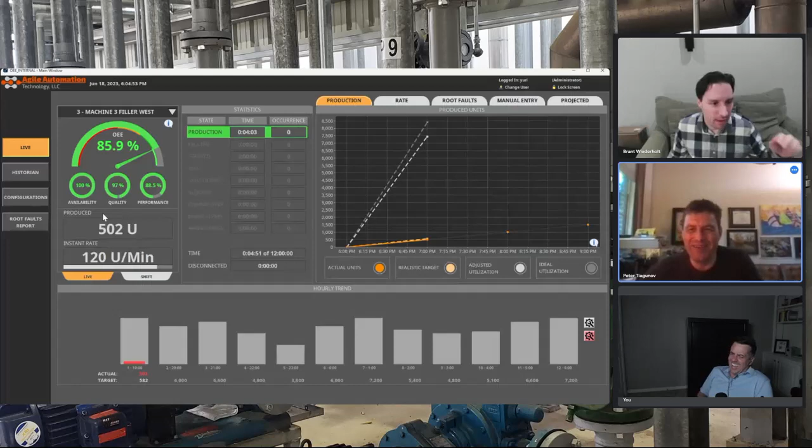I did forget about this, but you do have to put in your different products, and you have to type in your machines, and sometimes it's actually based on rate or totalizing. Anyway, you'll see the differences between the product and the machine - you can see there's different units, and that's all logged. So as soon as you make those changes, you'll see a log of who made those changes and what they changed.

Sorry guys, well - yep, I'm getting tired. I hope Johnny, we entertained you a little bit. Oh, it's always entertaining when you're around.